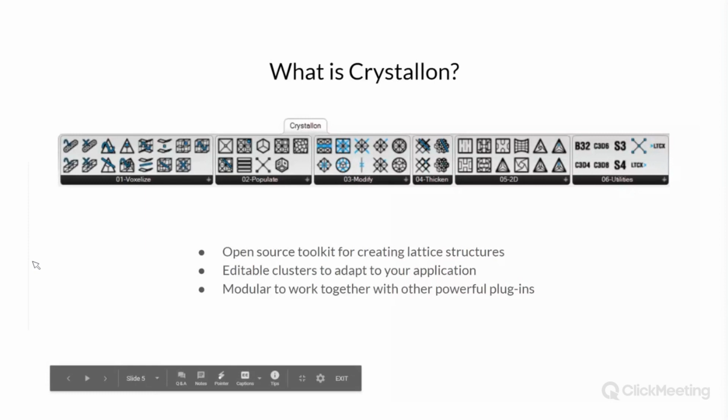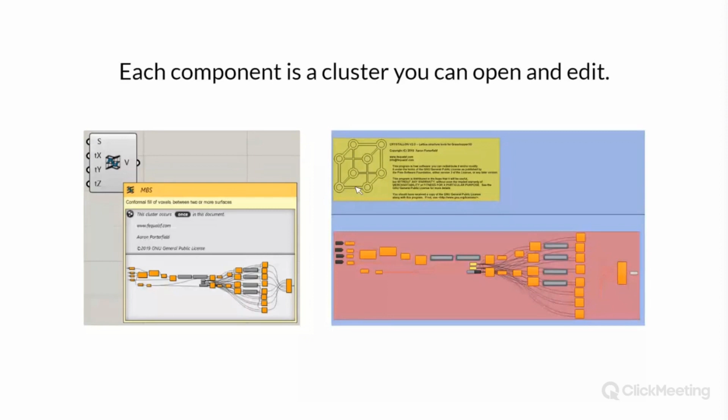So what is a cluster? A cluster is basically a group of another definition. So basically, I've made these definitions to do these specific things and then just put them in a cluster to make one tool to do it. And so if you hover over one of the components, you're going to see that there's a cluster inside. And if you double click on it, you see inside, this is the definition that makes up that cluster. So then if it's not working the way you want, or if you want it to do something else, you can figure out how it works by looking inside the cluster, and you can change it. And maybe if you make something useful, you decide to put it on GitHub and share it with everyone else.

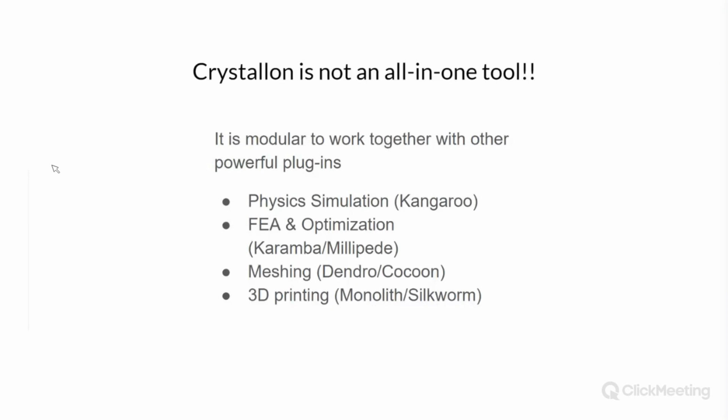What Crystallon is not, it's not an all-in-one tool. It's modular, so it's made to work together with other plugins. You don't need to have these plugins, but it will make your life a lot easier to use a lot of other things. So basically, I wasn't trying to reinvent the wheel by making this. So for instance, things like meshing for 3D printing, there's already really good software out there for doing that. So there's other plugins you can use, and I'm not going to try to make them myself.

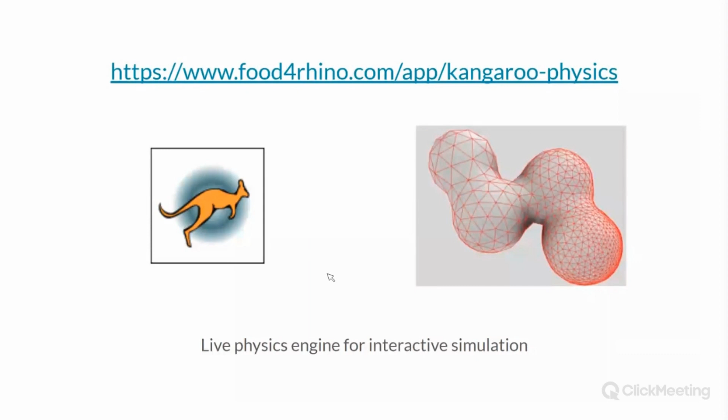So one of these tools, Kangaroo, which does live physics, which is really helpful for things like working with meshes. Weaverbird, also a mesh editor, super helpful. I highly recommend getting this. And Dendro I use all the time for making meshes. This is volumetric modeling, so it makes things a lot easier in doing Boolean operations and everything like that. And I'll be showing how to use this later.

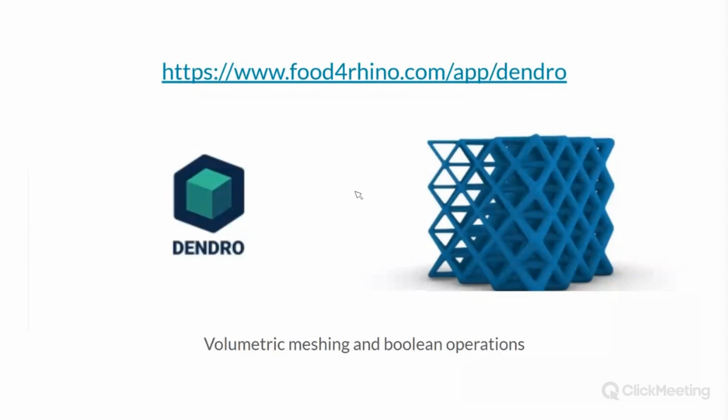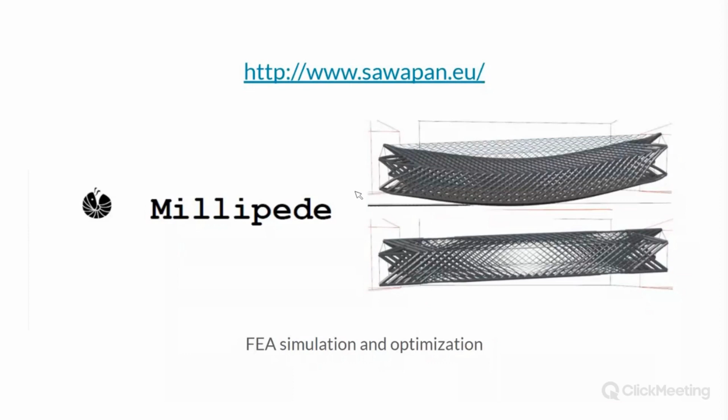And Millipede for FEA, simulation and optimization. I'm not an engineer. I don't get paid to do simulations, so I don't buy the other tools. Karamba is a very great tool, but I don't necessarily need something like that, but Millipede is very good and it's easy to use. And so I tend to use Millipede.

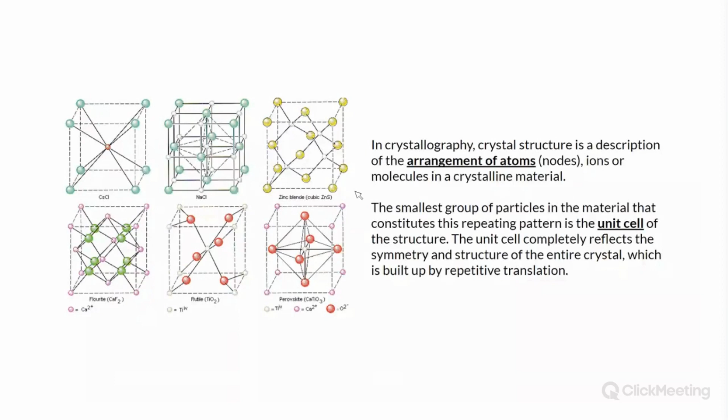So let's talk about what is a lattice structure. So in crystallography, this is where this term lattice structure kind of comes from, is the arrangement of atoms in a crystalline material. And so the smallest group of atoms is called the unit cell, and that's what you see here. So for different materials, you see these unit cells have different structures, and this is the base of the symmetry of the crystal structure. And so each of these cells, unit cells, gets repeated in 3 dimensions, and that's what makes up your lattice.

What makes a diamond so hard? It's because of the structure. So in every crystal and lattice material, the structure of the lattice is what gives the material its physical properties like strength, density, even optical properties. And it's the arrangement of atoms and the bonds between them where they're sharing electrons that give the materials their strength.

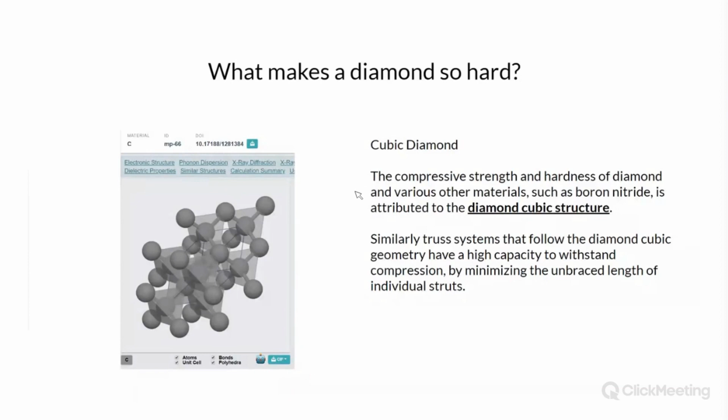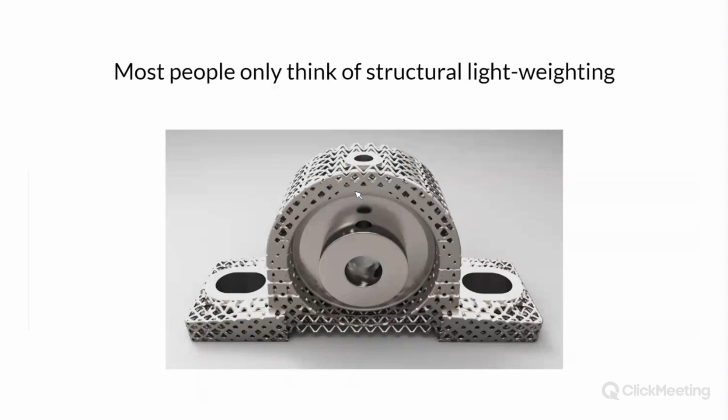So why do we use lattice structures? So most people just think of structural lightweighting. This is the most obvious application. You reduce material and mass while maintaining the desired strengths. And basically, most man-made things can be made with less material. And this is just a way of doing that in a simple way. But there's a lot more things you do with lattice structures.

Things like structures for bone tissue attachment in medical implants. Things like using flexible materials to absorb energy, kind of like engineered foams and padding. Structures with high surface area that create turbulence in fluids for heat exchange, and materials with a specific porosity that we can use for filtration. And even plastic. Plastic is a great insulator, and especially if you trap air in those pockets, it makes a great thermal insulator.

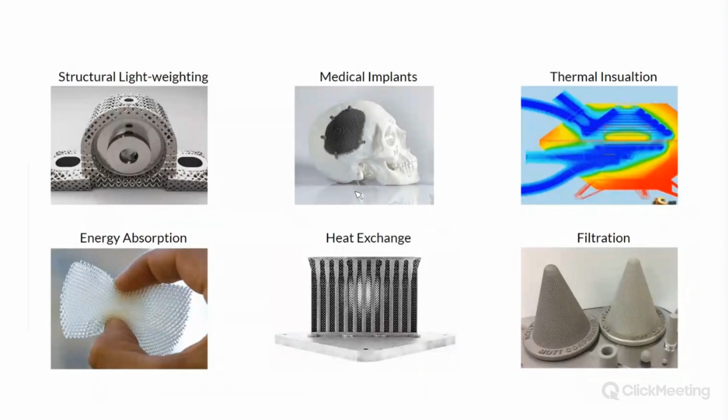So how do we make a lattice structure? So you can use Crystallon, and if you want to use Crystallon, you can continue listening. So we can't 3D print atoms and tell them that they need to share electrons, so we can't really make crystals, but we can make things that simulate that kind of thing. And we simulate those bonds between the nodes with things like beams or surfaces made of a material. And so I use the terms beam and shells because that's what's used in FEA. Shells are kind of surfaces, beams are thin, either rectangular or cylindrical tubes.

A voxel is a unit of space that a single unit cell fits inside. And so we create voxels inside of our geometry to populate with a lattice structure. And then last, we can add some skins or some kind of other mating surfaces, critical geometry, and then we'll add that to the lattice.

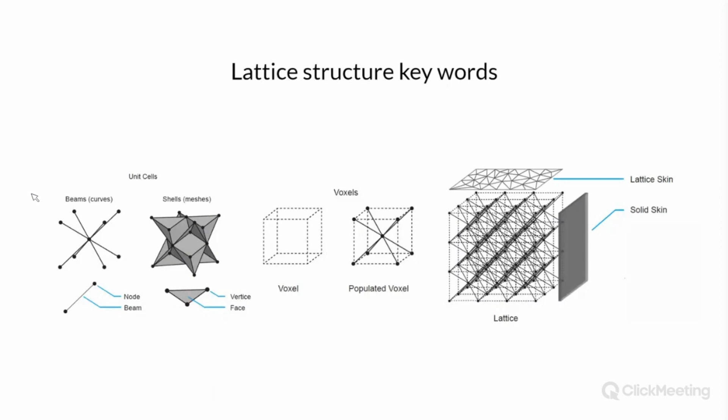So what are the steps? So this is kind of the basic workflow, and this is going to be pretty similar for any kind of lattice software you're going to use. You're going to start with a design space. This is your part. This is your thing you want to make. And we fill that space with voxels. And how we fill that space is what's going to make different softwares different.

Once we have these voxels, we'll pick a unit cell, what we want to fill those voxels with, and we populate those voxels. And then usually there's going to be some trimming, cleaning, modifying we want to do to that lattice because, you know, there's going to be beams that go places you don't want them to go. You're going to trim it to your design space, the desired shape you want it to be, things like that.

And once you have your final lattice, then usually you're going to do some kind of simulation or optimization. And that's typically where you're going to go back to step 2 or 3 and change the design until the lattice does what you want. And the last thing you do is make a mesh. You don't need to make a mesh every time just to see it. And that's what's nice about using Grasshopper and Crystallon is you can parametrically make this, and in the end, then you just make a mesh.

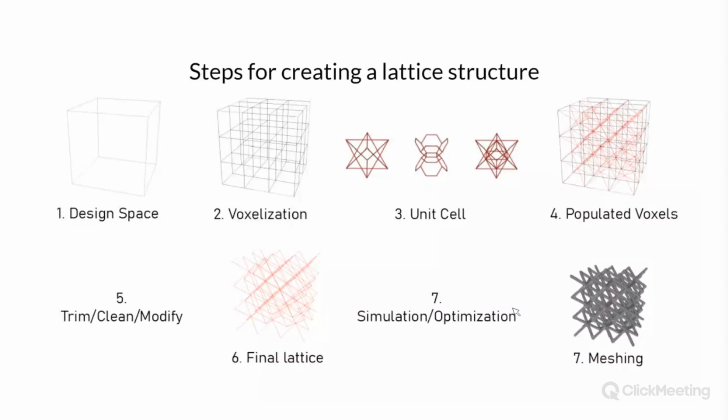So what is the benefit of Crystallon? Well, most software out there is kind of an external tool. And so basically you have to design a part in Rhino or SolidWorks or whatever, export that and bring it into this other software. And then you just have this kind of dumb geometry, this shape that you want to fill with a lattice. But with Crystallon, we're inside of Rhino and we can use Grasshopper to create our lattice design parametrically.

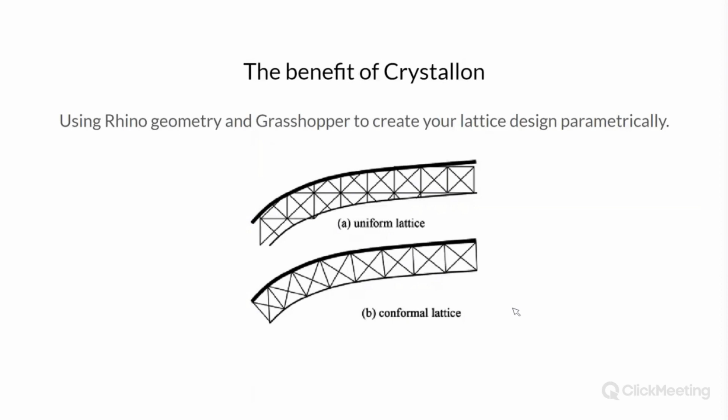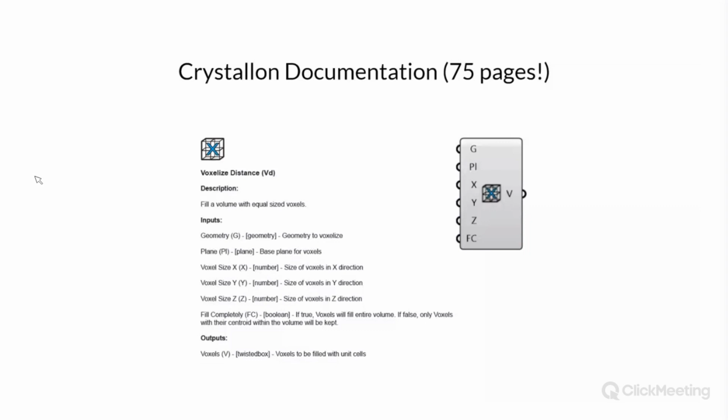So before we dive in, let's look at what resources are available. When you download Crystallon from food4rhino.com, you get installation instructions, documentation, libraries, which are the source files, and example files. The documentation is 75 whole pages I made all by myself. There's a description of every single component: the icon, the name, a description of every input, what kind of data it's looking for, what it's going to do, and the outputs. So if you're ever wondering what a tool does, check out the documentation.

We also have example files. I've made an example file for pretty much every single tool. So if you're trying to understand how a tool works, check out the documentation and check out the example files.

The Crystallon toolbar is basically laid out step by step in the workflow you will use. We'll start by making voxels. We'll populate those voxels. We'll do some modifications. We'll do some things to thicken them. The 2D tools are kind of experimental for right now. They're used for making flexible materials out of 2D materials like laser cut lattice hinges or flexible sheet materials. I won't talk about those during this, but if you're interested, you can check them out.

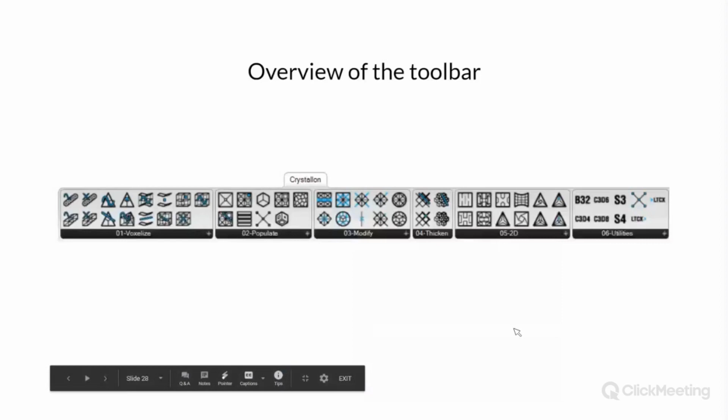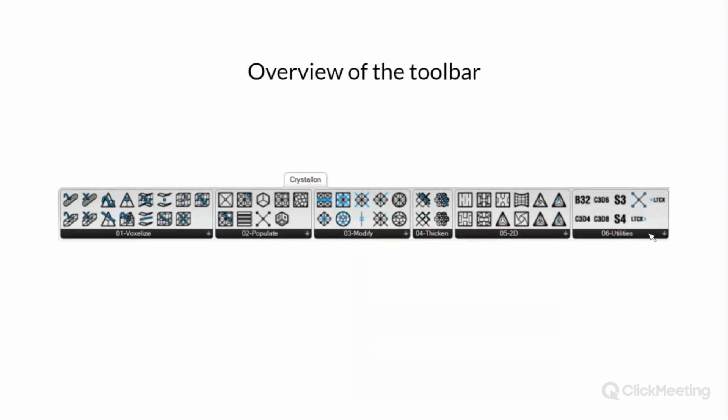And lastly, the utilities are mostly for import and export to FEA applications. I'll be working on more file formats as I go along, but for right now I have INP files, which are for FEA. So if you're using ANSYS or Nastran, you can use these input files and do some simulation. There's also import and export for nTopology, the LTCX format, and I'll be working on some more.

Cool icons. What do they mean? I'm not really a graphic designer, but I tried my best at making some icons that describe what these tools do. The blue parts on top tell what that function is going to do. The ones with the X mean it'll work with an absolute value and absolute distance. The ones with a little sine wave mean it works with a parameter, which is divisions of a distance. Things with a little point mean it uses points and values. And things with a line mean it'll work with attractors, and attractors can be curves, points, surfaces, anything.

All right, you guys ready?

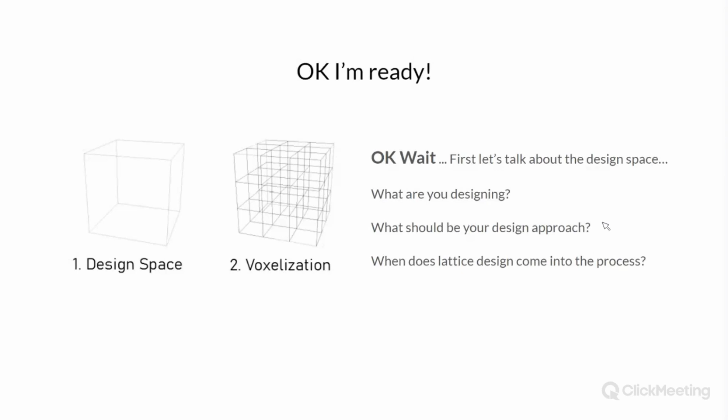All right, wait. First, I'm going to talk a little bit more about design space and design approach. What are you designing? What should your approach be? When does this come into the process? A lot of times I get questions like this: can you lightweight this, please? And basically the answer is no, sorry. This part was obviously designed for injection molding, and if we want to make it lighter, I wouldn't even know where to start. If we want to design for additive manufacturing, we need a whole new mindset. We need to start over and think: what does it do? What are the critical features? What's the entire space I can use?

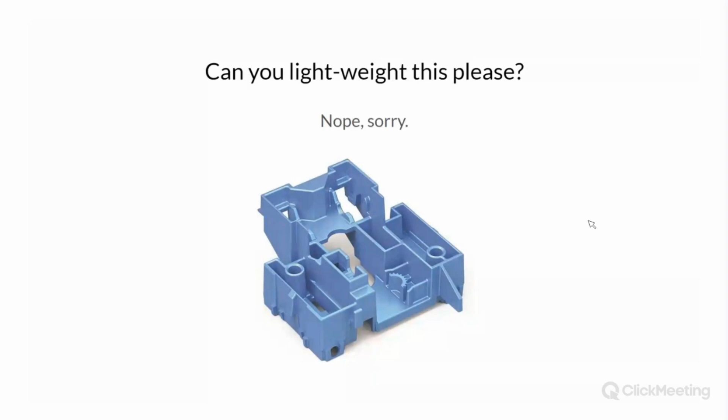So I like to compare this to topology optimization. If you guys don't know what that is, topology optimization is basically an algorithm for distributing material with the least amount of mass and the maximum stiffness. So make the strongest, lightest part possible, or it'll try to.

But if you give the algorithm a limited design space, so if you design the part basically completely and then ask it to take material away from that, there's not much you can really do. But if you give it all the space it has to possibly work with, then it can come up with a solution. And so you can see here, the first design, the engineer was pretty close to what would be optimal, but the topology optimization did things a little bit differently, a little better probably, who knows.

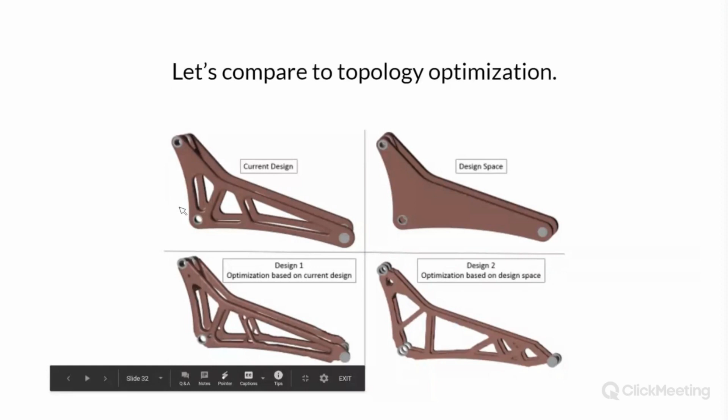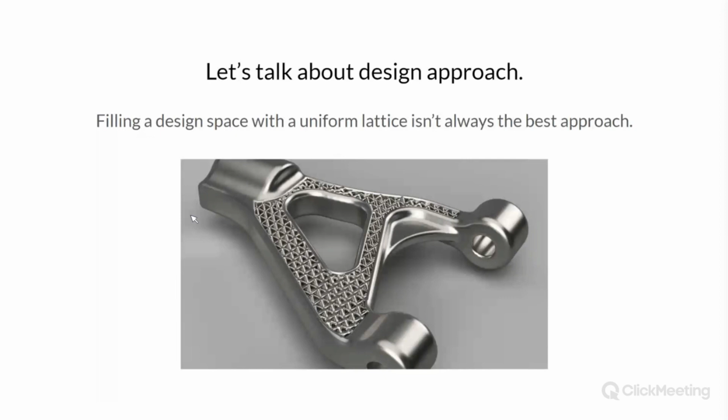And let's talk about design approach. So like I said, most software, you're going to be very limited because you have to import what we call dumb geometry. You just export an STL or a STEP file or an IGES file into this program, and you lose all that information about the design, the surfaces that were used to build it, the curves you used to build it. And so you're limited to just a volume that you fill. For a lot of applications, that can be totally fine. But if you want to do more, that's probably why you're here.

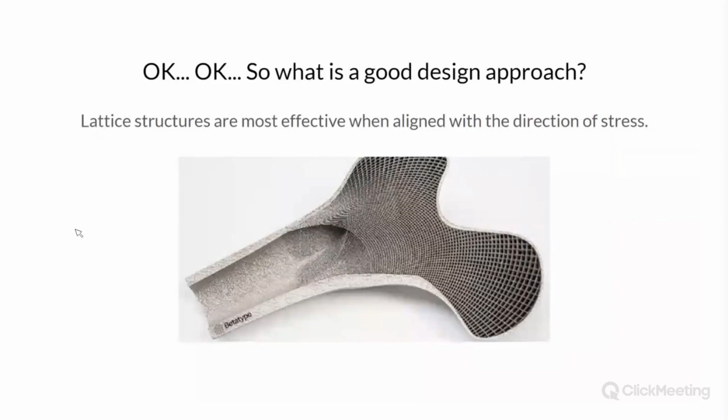So what is a good design approach? Lattice structures are most effective when aligned with the direction of stress. So ideally you want to make your lattice conformal to the surfaces or the stresses that are going to be applied on it. A good example is bones. Bones are constantly deconstructing and rebuilding themselves based on the stresses, which they sense basically through chemical, electronic pulses. When you put weight on your bones, it tells them to build bone mass in certain areas. And this is also why astronauts lose bone mass over time, because they don't have gravity to apply stress to their bones.

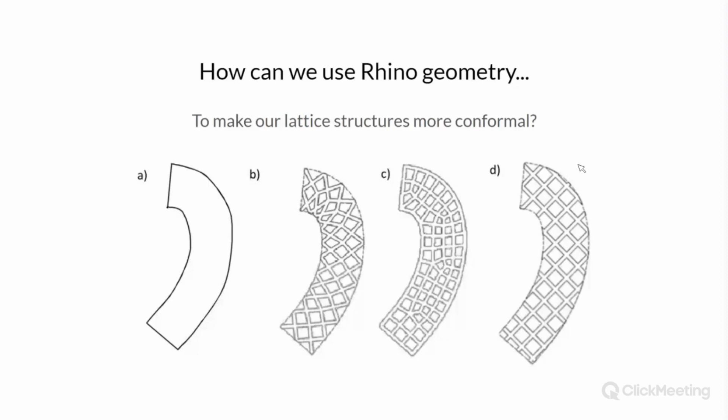So how do we use Rhino geometry to make our lattice structures more conformal? In the example, B is basically what we're going to be able to do. C would be nice in the future, we're getting there. And D is probably what you're going to see in most software. But with Rhino, we have these volumes, we can use surfaces, we can use curves and points. And with Grasshopper, now we have things we can use like physics. We can use data from FEA simulations, all kinds of tools, and within the process of designing the lattice, use that data to help design the lattice better.

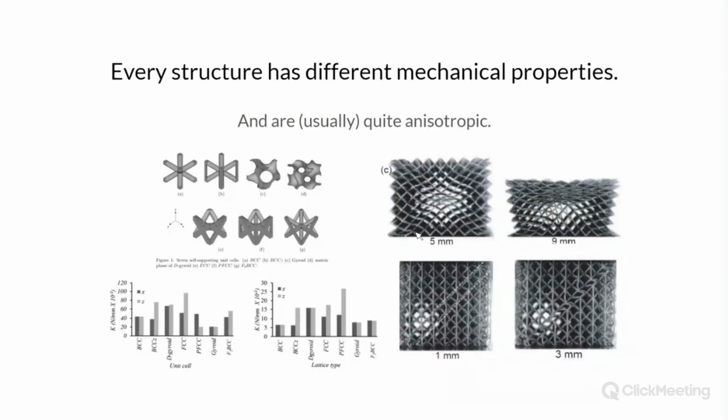So what kind of structure should you use? Well, I don't really know. It really depends on what you're making. The best structure is completely up to your design, your application. One unit cell might work great for one design, not for another. So it's always trial and error. There's no lattice design software that's just going to give you a solution. It takes testing, it takes simulation. A lot of the time it takes actually printing the thing and physically testing it, because it can be really hard to simulate as well.

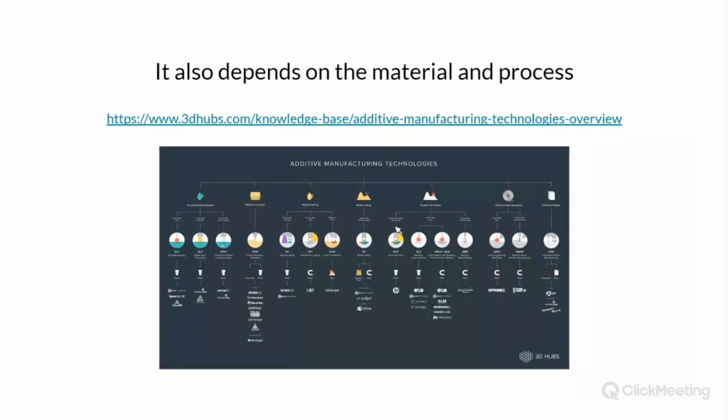And it also depends on the process and material. Before you're ever designing anything, you should really know how it's going to be made and what material. Each process has its own advantages, its own limitations, things like material thickness, if it needs support material. Those are all things you should take into account as you're designing your lattice structure, thinking about how it will be built and what material.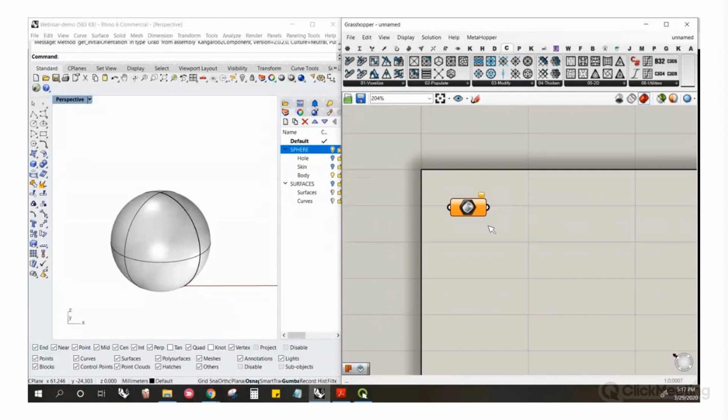All right, so I went through that fairly fast, so I think we've got plenty of time to do some demos. Let me hop over to Rhino and we'll get started. I'm going to start first with showing the voxelization tools. Let's start with just creating some voxels on some things. If your geometry is kind of a strange shape, like you have this